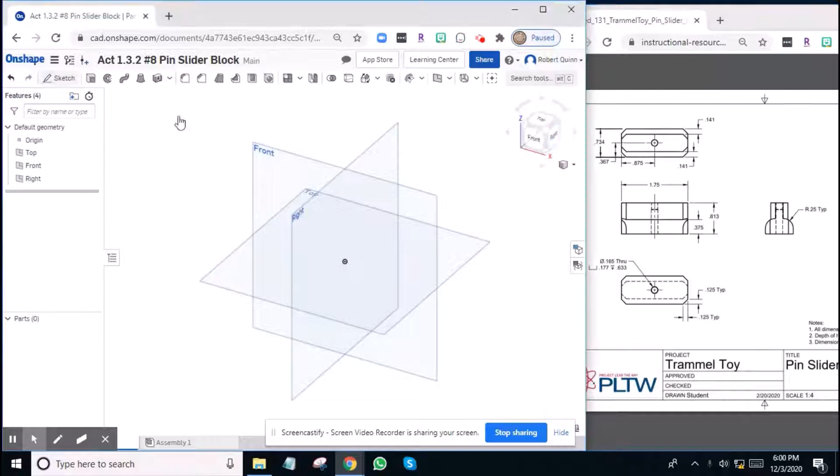Okay, I'm going to show you how to make activity 1.3.2 #8, the pin slider block. First, I'm going to use these overall dimensions. See, this is 0.734 by 1.75. So I'm going to make a new sketch on the front.

Click on front. I'm going to make a rectangle, as I just said, and now D for dimension. This one's going to be 0.734. And this one is going to be 1.75. Now I'm going to extrude it. If you see over here, it says 0.375 tall. So I'm going to extrude 0.375 tall. Finish that sketch. Extrude.

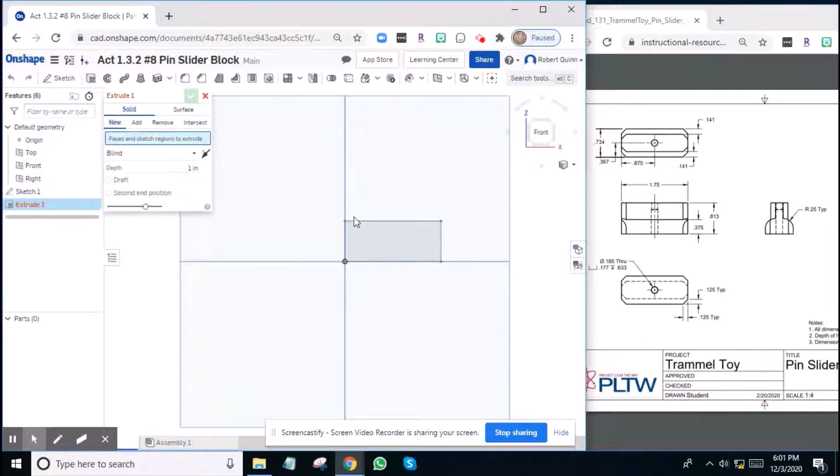Click on the corner so I can see what I'm doing. And we're going to extrude 0.375. Enter. There we go. There's our extrusion. Now I'm going to chamfer these edges. If you see down here, see how it says 0.125 typical? That typical means if it looks like it, it probably is the chamfer.

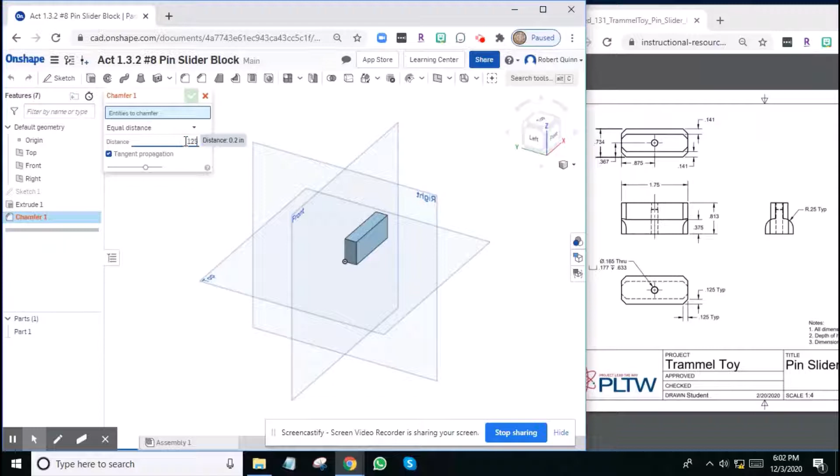So I'm going to have four chamfers on the outside, all four of them. Later on, when I do the top, you'll see there's four chamfers on the top as well, right here. But I'm just going to do the outside ones right here. So I'm going to click on the chamfer tool. Under entities to chamfer, it's going to be 0.125, and it's going to be equal distance because both of them are 0.125.

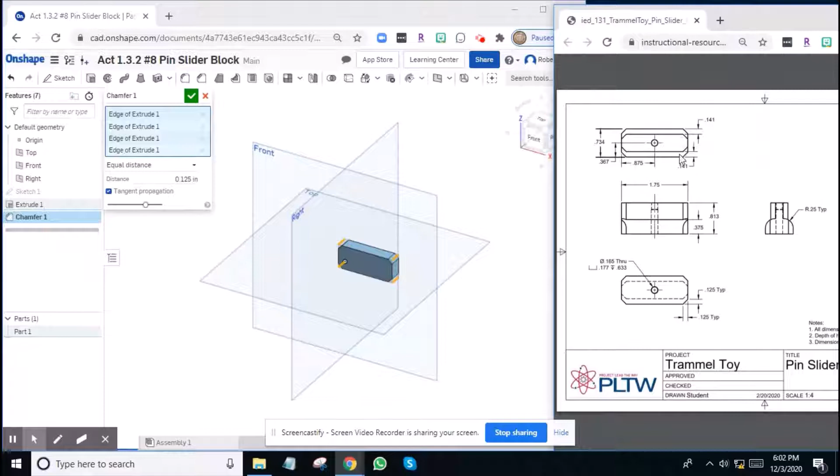And I'm going to click on the edge. I'm not going to click on the face, I'm going to click on this edge. And I'm going to do this edge, and this edge. So notice we have three edges so far, and I need to get the other edge down here. That way I've chamfered all four of those edges. So I just made 1, 2, 3, 4 of those chamfers. I'm going to check, and those are done. Okay? So I did this whole base part on the outside.

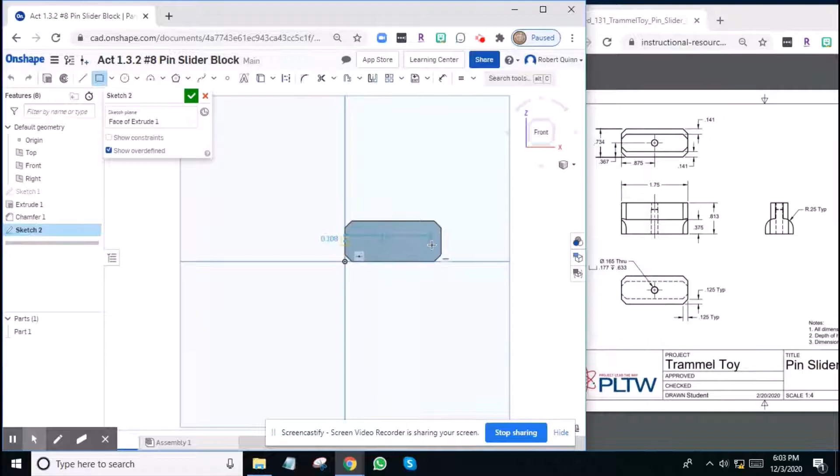Now I'm on top. I need to make this rectangle and extrude that and chamfer it. So I'm going to right click and make a new sketch. And I'm going to click on front, so I'm looking at it head on. And I'm going to make a rectangle, kind of there-ish to there-ish. Okay. Now it's 0.141 from each side, so I'm going to hit D for dimension. From this edge to here is 0.141. Same thing over here, 0.141.

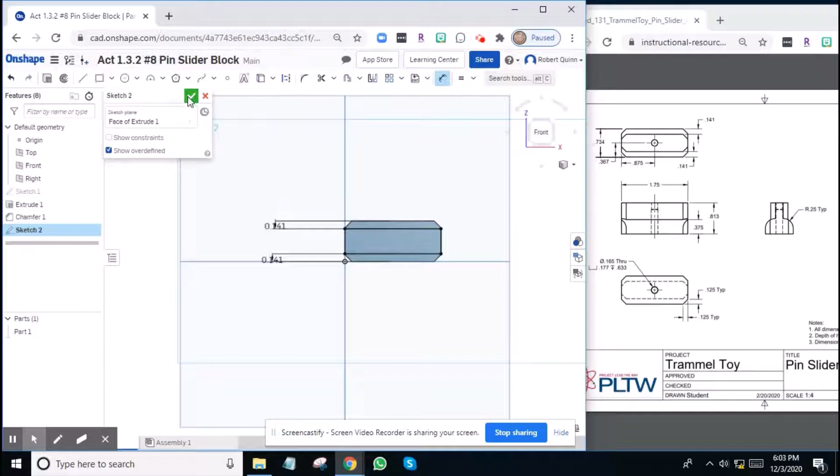Okay, now I'm going to extrude it. It's going to be 0.813 minus 0.375 tall. All right, done with that sketch. I'll click on a corner so I can see what I'm doing. And I'm going to extrude, and click on that rectangle. And it's going to be 0.813 minus 0.375. Hit enter. Okay, so notice what it does.

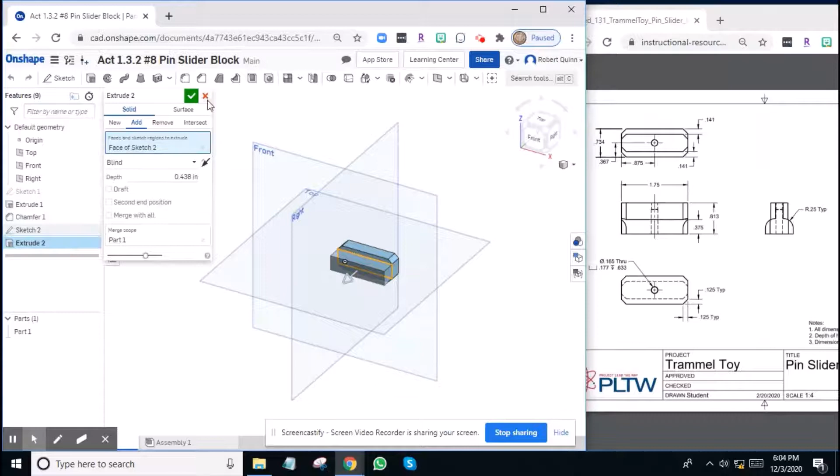It should do the math for us. So 0.8 minus about 0.4 should be around 0.4 tall. So let's see if we double click on it. See, around 0.4 tall. It's a computer, so it'll do the math for us. Okay, now I'm going to do those same four chamfers on these four edges.

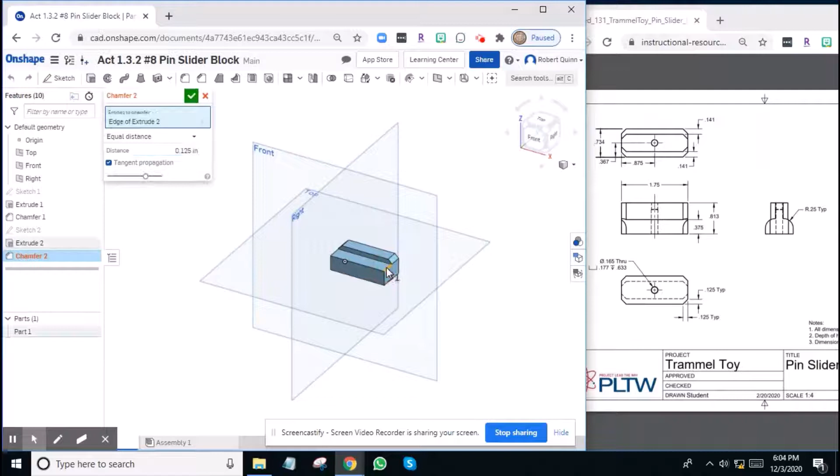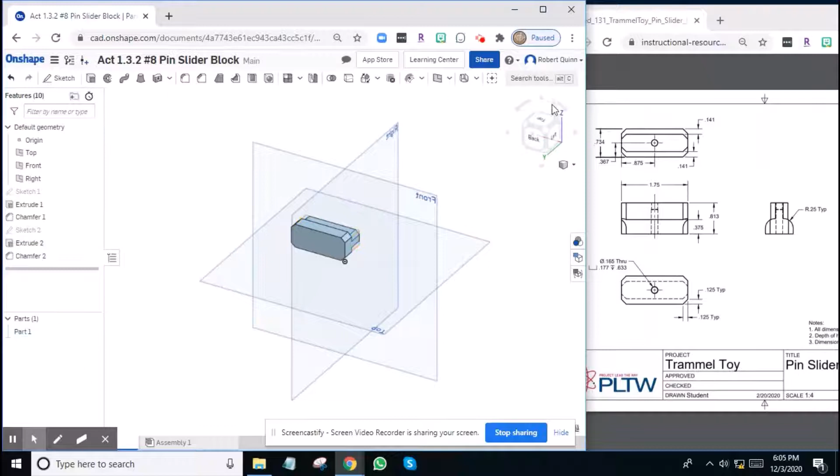So I'm going to click on chamfer again. It's also going to be 0.125, 0.125. Again, 0.125 typical means it looks like it. Equal distance. So I'm going to click this corner, this corner, this corner. And now I need to get the opposite side. I need to be able to see this corner. So I'm going to get that corner. There we go. I got all four edges of extrude two. That looks good. Let me spin it around so I can see.

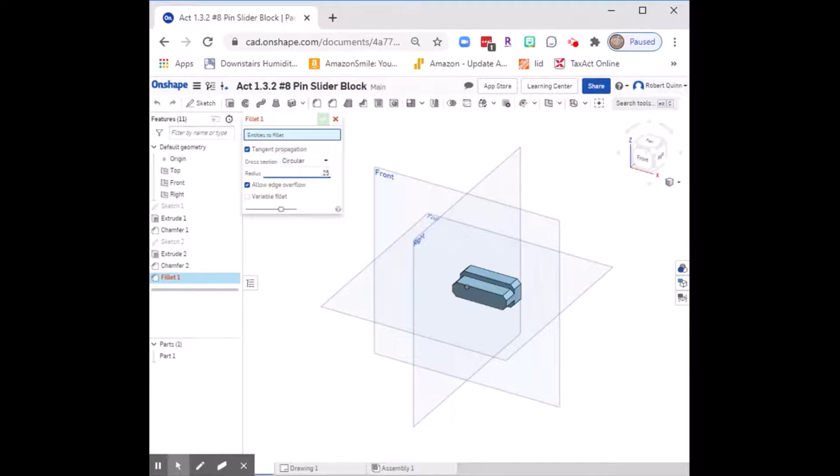It looks pretty good. Next, we need to make a fillet. There's the fillet tool, click on the fillet tool. The fillet is a radius of 0.25, and I'm going to click on this edge here. The fillet's that one, and I need the opposite one. Oh, that's the wrong one. Let's see, I need a corner. There we go, and I need to fillet that one also. So those are filleted. Check, that's done.

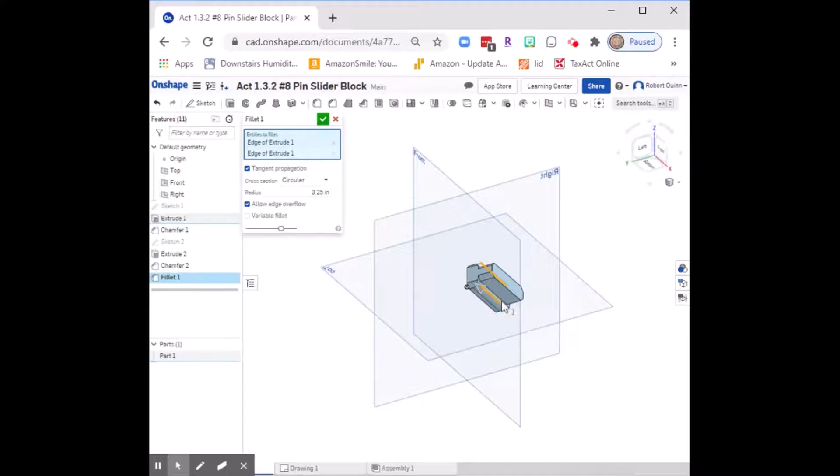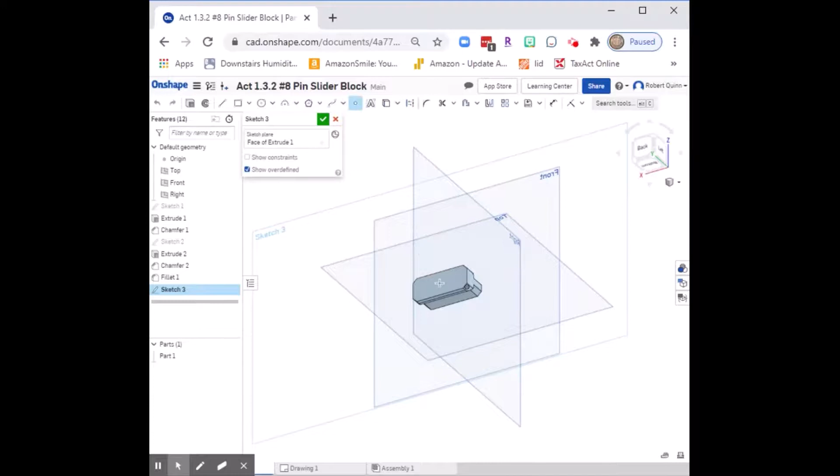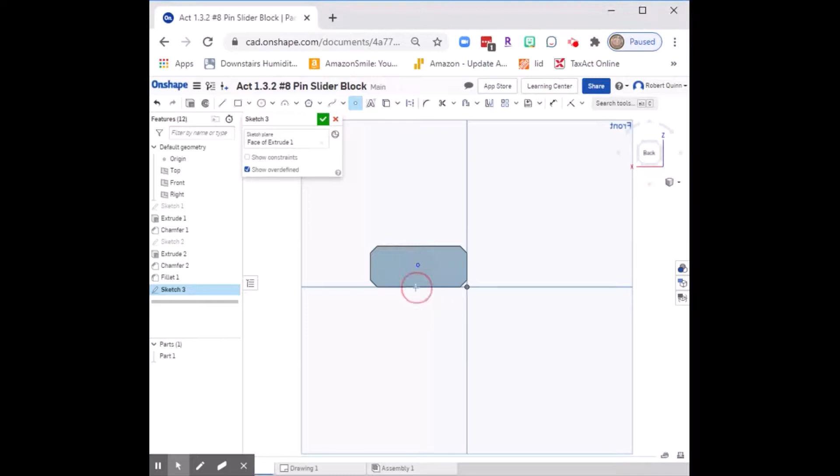Now the last thing, we need to make a hole. We're not going to do it on the front. It's got to be the opposite side, on the bottom. So I'm going to make a new sketch, and I'm going to place a point on that sketch. Click on back so I'm looking at it head on. It's going to be centered. So D for dimension, from here in the X direction. That didn't take.

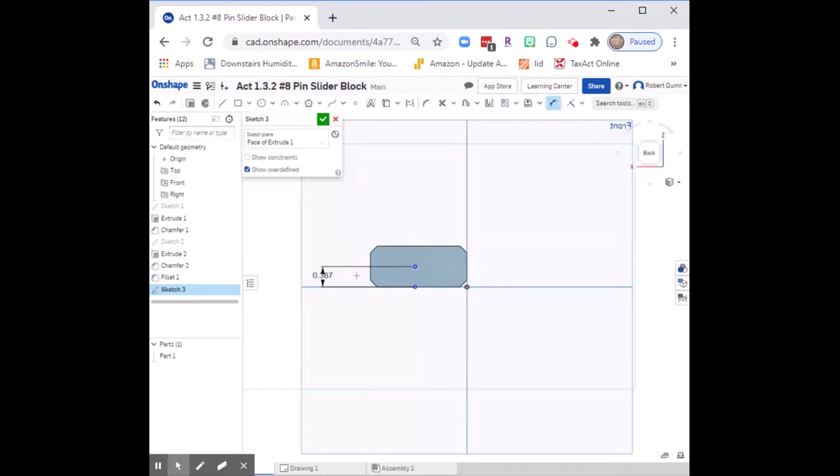Click on dimension. From the point to the bottom edge is going to be 0.367. And from here to the left edge, the total width is 1.75. So to put it in the middle, we're going to do 1.75 divided by 2. It'll do the math for us. Okay, so there's our hole. Now I click check.

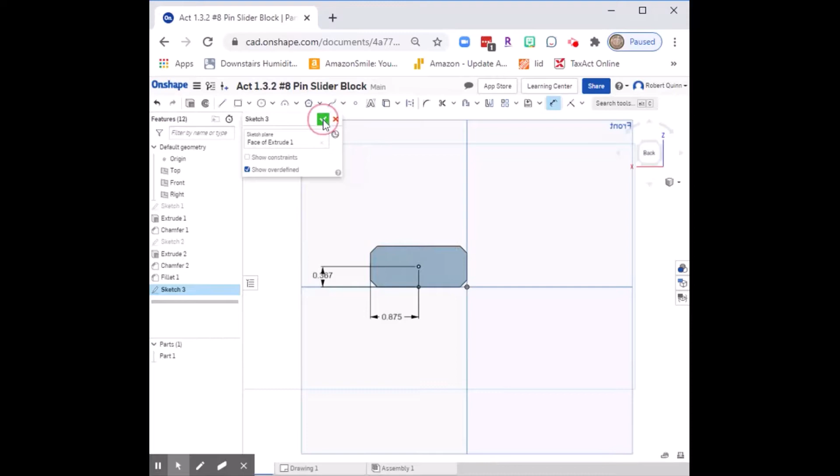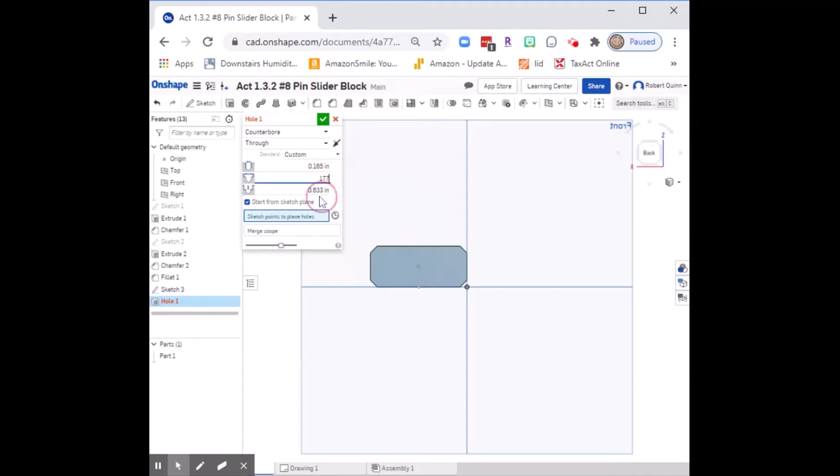Now I'm going to click on the hole tool. We are going to make a counter bore hole. The width is going to be 0.165. That's the diameter of the through hole. Notice it's a through hole. The diameter of the counter bore is 0.177, and the depth of the counter bore is 0.633. Let me make sure I click on the hole so that that's set, and click check.

And there we go, it's done. If we zoom in, it's a very narrow hole, but we can see the counter bore of the hole. So that's how to make 132 number 8, the pin slider block.